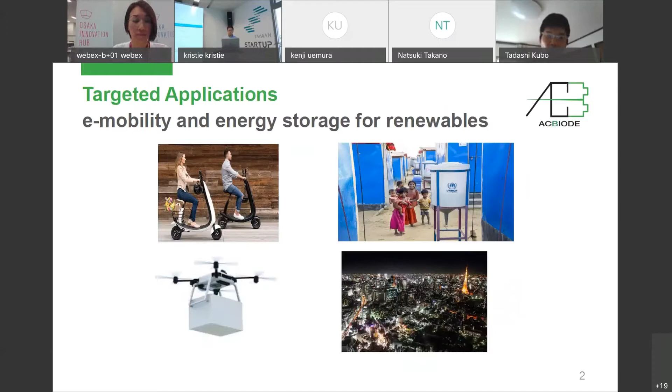The challenge of the battery is that we need better and safer batteries. Dr. Yoshino last year won the Nobel Prize in chemistry finally. But at the same time, we realized it takes lots of time and money to develop new materials or new types of batteries other than lithium-ion batteries. Over the past 30 years, the basic principles of lithium-ion batteries remain the same because it is so difficult and takes time as well.

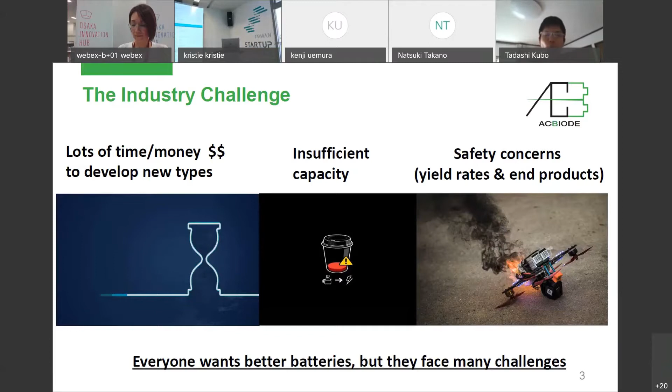So our concept is that we use all the existing materials and existing battery production lines. We don't change those, but we change the current from DC to AC, because power transmission, distribution, and motors have both options of AC and DC. But all the batteries in the world work at DC only, not AC, and we were wondering why.

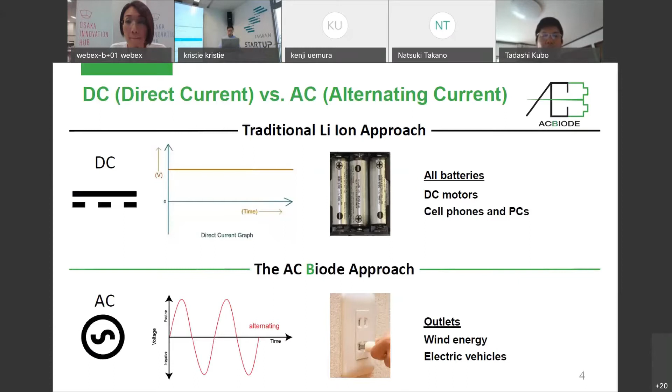So we have developed the world's first AC battery using a single battery and a single switch. The electrode we developed is named Biode, a new word we created. It's like an intermediate electrode between the anode, minus, and the cathode, plus. The blue ones you see on this slide are our biodes, and we set multiple electrodes within a single lithium-ion battery. All the materials and battery production lines remain the same, so we don't change them.

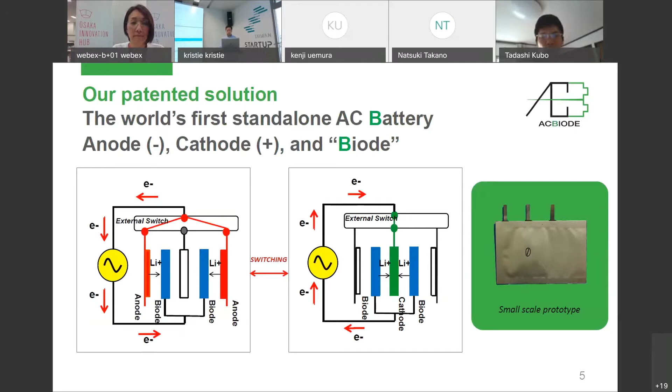The advantages we have compared with current DC lithium-ion batteries are mainly seven. First, it's safer, and we reduce the cost of battery electronics because we can minimize inverters and converters that convert between AC and DC. We double the lifetime. We have higher capacity with a special circuit we're also developing, named the Cockcroft-Walton multiplier, plus 15% higher capacity from the biode, which also acts as a separator — it's an integration between separator and electrode.

It's chemistry agnostic. First, we're going to apply it for lithium-ion batteries, but we can also apply it to, for example, lead-acid or solid-state batteries, future battery types as well. Last but not least, it's compatible with existing materials and existing battery production lines, so we use the same supply chain.

These are some examples of our competitive advantages. We split electric potential from 4 volts, as in current lithium-ion batteries, into 2 volts each. But we keep the 4 volts entirely, so we don't lose capacity, yet it is safer.

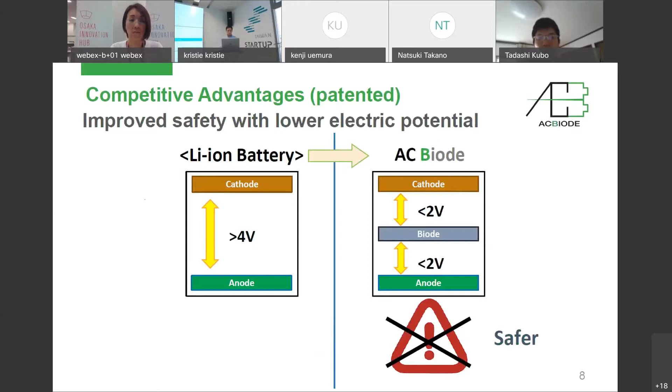This is the image of how we minimize inverters, for example. Brushless DC motors, even though named DC motors, actually use 3-phase AC for their motor system, such as in electric cars. Right now, DC batteries convert from DC to 3-phase AC through an inverter. Now, each of our batteries emits single-phase AC, so we can minimize this system, making it more compact and more affordable.

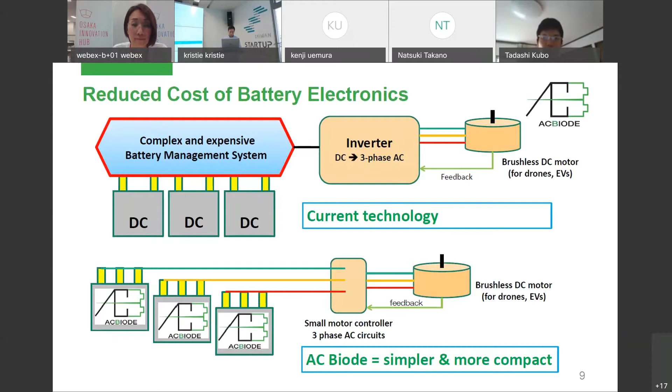The Cockcroft-Walton multiplier isn't something new. It was established back in the 1930s at the University of Cambridge in the UK, and was used to boost voltage for particle acceleration or X-ray equipment. Our idea is to combine our AC battery system with this circuit, because its input has to be AC, not DC. So this is a perfect match between AC batteries and the multiplier.

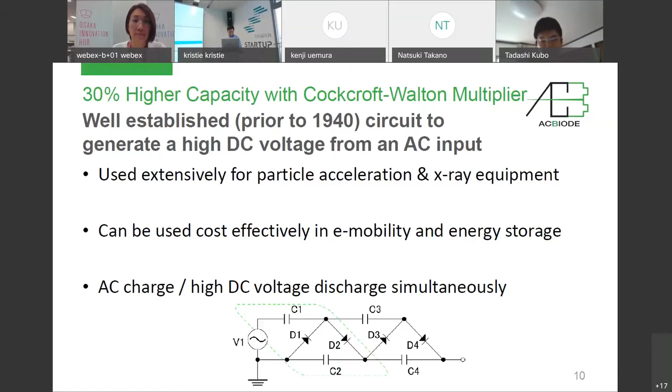We already got patents on these concepts, ideas, and structure. The market is growing — we would tackle the Asian and European markets, which will be worth 21 billion US dollars by 2026.

Right now, we have already raised seed funding and got some support from the government. By the second quarter of next year, we will first test with industrial drones, because drones are much easier to start with. Then we will also test with e-scooters, e-bikes, and other micro mobility. After that we will tackle electric cars and energy storage, especially for wind power, because wind power generates AC power, not DC, while solar panels generate DC power — so probably the best fit will be wind power.

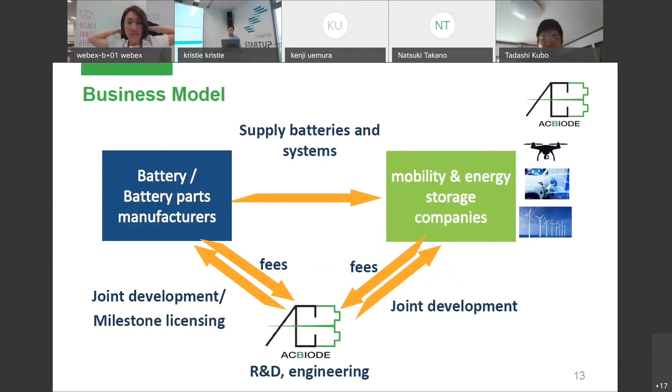Our business model is providing licensing, receiving license fees by offering licensing or joint development together with battery companies or battery parts manufacturers. We could also get fees from end users in mobility and energy storage. We aim to reach around 10 million US dollars in sales within 4 years.

We get several good feedback from clients and several institutions, such as University of Cambridge, MIT, European Space Agency, and the City of New York, and more. And we get investment from EIT InnoEnergy, which is a body of the European Union. The European Union wants to have a local battery manufacturer and startups in Europe, because right now European countries import

almost all the batteries from East Asia, such as Taiwan, Japan, South Korea, and China. So the traction we have so far, as I mentioned, we already have prototypes, and we will do pilot tests with drones next year. We already received at least 5 LOIs from battery companies and potential clients, as well as industrial end users such as drone companies and more. We also won 16 awards from startup pitch competitions around the world, and we're supported by the European Union as well.

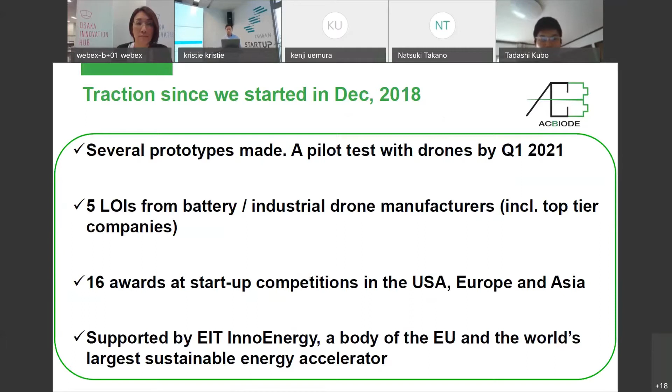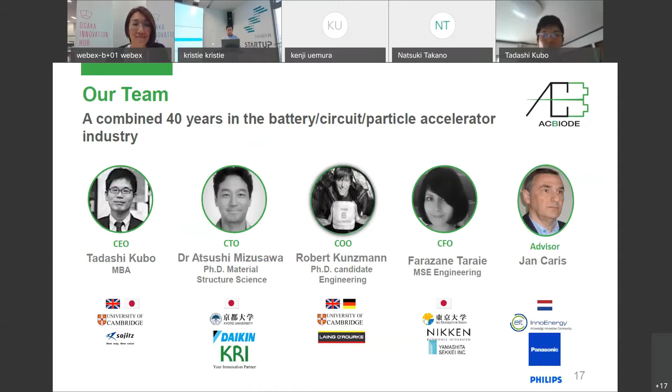So it's almost time, so that's it. And I'm happy to answer your questions.

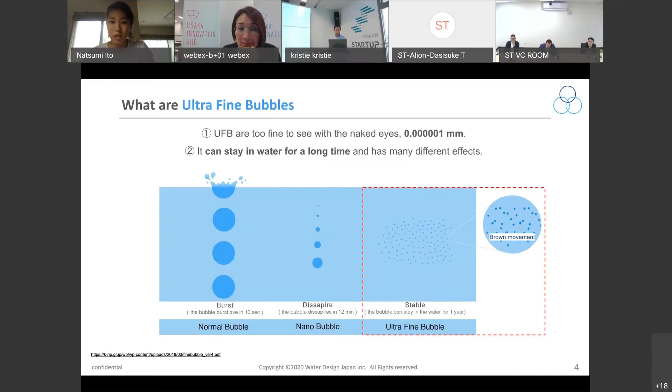It moves around like Brownian motion, and because of that, the bubble can stay in the water for more than a year or so. Because of this interesting effect, ultrafine bubbles have been proven and tested to have several effects, such as these 4 effects.

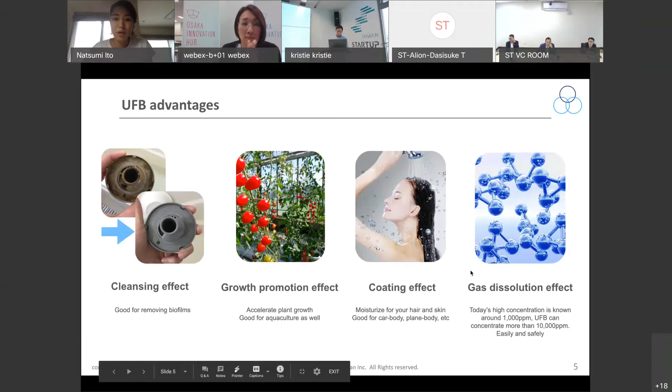First one is cleaning effect and growth promotion for the plants, and coating effect for surfaces, hair or skin, and the last thing, gas dissolution effect. It has many interesting effects, but today I would like to focus on the cleaning effect part.

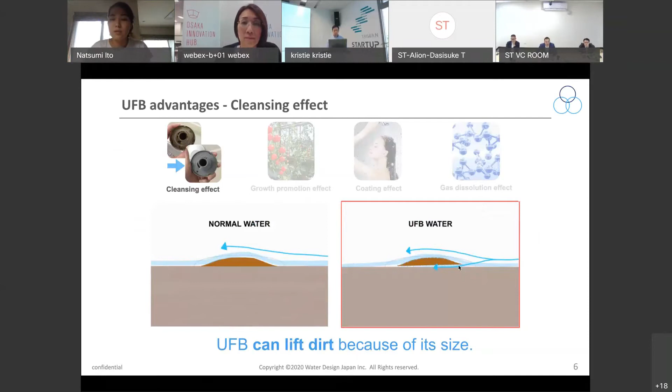So why the water can have a cleaning effect is that the bubble size is very, very small. It can reach to the bottom of the surface and it can gradually go underneath the dirt cell to lift the dirt cell itself and remove it.

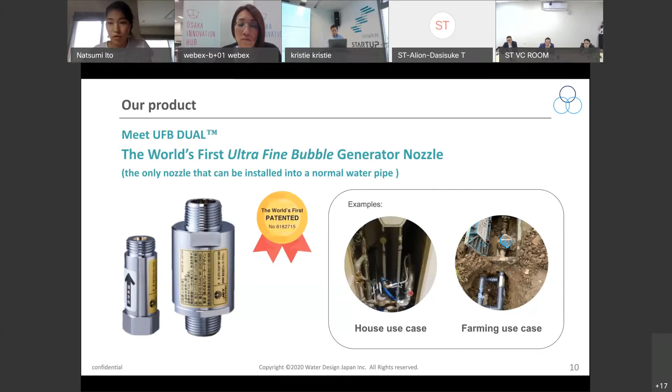And our product is this, and it can generate that technology, ultrafine bubble. Our product got a patent and also approved as a water supply in Japan, so our product can be implemented after the water meter. So all the water coming into your building will be transformed into ultrafine bubble.

The technology we use is basically a cavitation system. So let's say the water coming in from the left side. Once the water passes through the nozzle itself, we can generate the ultrafine bubble technology.

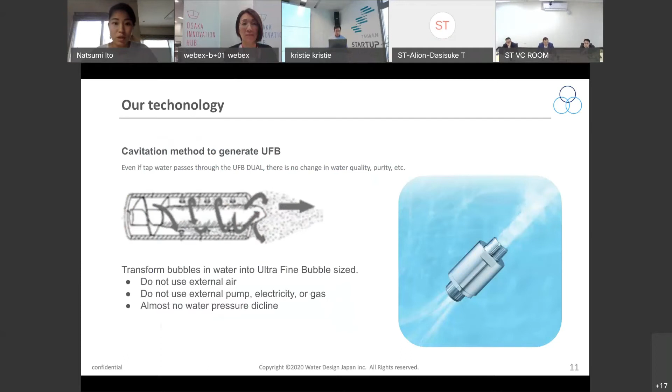The difference compared to competitors is mainly that it's installable into pipes. There are around 100 to 200 competitors who are studying or trying to produce an ultrafine bubble related product, but none of them have passed this certificate. Only we have this certificate to be implemented as a water pipe, and why we were able to do so is basically two points.

The first one is the way we generate the bubble. We don't use external air because this air can contain a lot of germs and bacteria, and it's not safe. So we use water, and by doing that, we were able to pass the drinkable test in Japan.

The second point is almost no more water pressure decline. It's a complete standalone device. You do not have to have an external pump or electricity or gas or anything.

Lastly, since we have different customers from factory to home building to hospital, we can customize depending on the customer's needs in sizes and materials. And we got certificates such as those.

So let me explain a little bit about the actual use cases. Our product has been used at hot spring facilities in Japan. The problem the hot spring facilities are facing is the Legionella bacteria, which is really hard to remove.

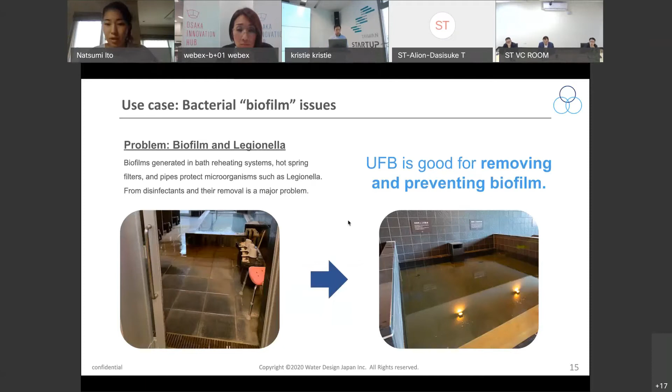This bacteria lives in the biofilm, and ultrafine bubble is good for removing and preventing biofilm itself. So the hot spring facilities were very happy using our product, and a lot of hot spring facilities have been using our product right now.

This scale is tricky because in order to clean it, hospitals use a very strong chemical and have to clean it consistently. By using a strong chemical, sometimes the water pipe gets really damaged, and it was a huge problem for the hospital itself.

We used ultrafine bubble with it, and we were able to reduce around 60% of the maintenance costs by reducing their chemical use.

Right now, they have still been using it for almost four years, and they also reported that they haven't changed their filter, which costs around $10K US per year, but they were not changing that filter. So it's a cost reduction for the hospital itself.

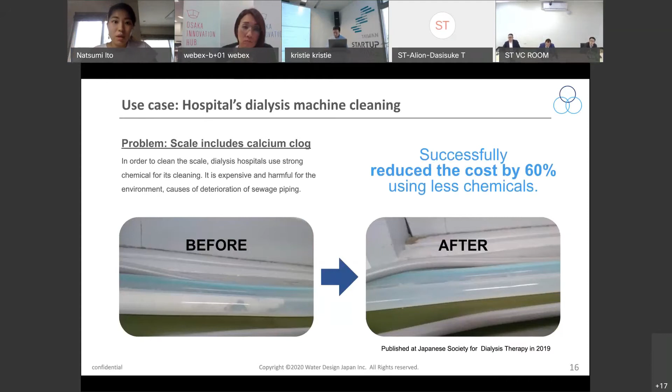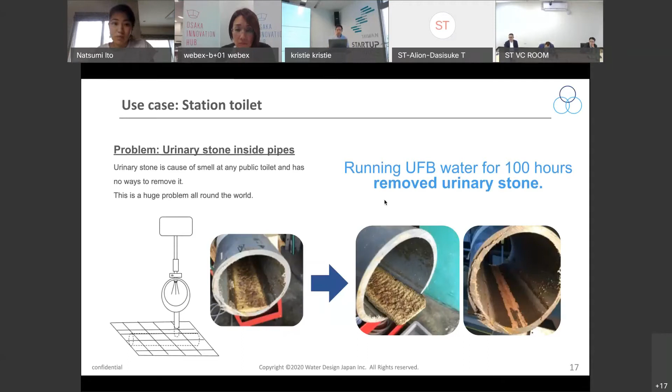We are a startup, but we are growing organically without any marketing. Our product has been used in more than 5,000 places in Japan at the moment, and we are bootstrapped. This year we're expecting $1 million US revenue, and we have partners such as cooking oil manufacturers, energy companies, healthcare, and of course housing, restaurants, beauty salons, hot spring facilities, and a lot of different places.

And now we are looking for a partner, not just a sales partner, but we have on top of that a lot of different benefits from partnering with us.

We already have been working with many different companies in Japan. This is the team, and our founder is a former CEO of Mitsubishi Chemical Company, that's why we were able to build such a product. There is some more information, but that's Water Design Japan.

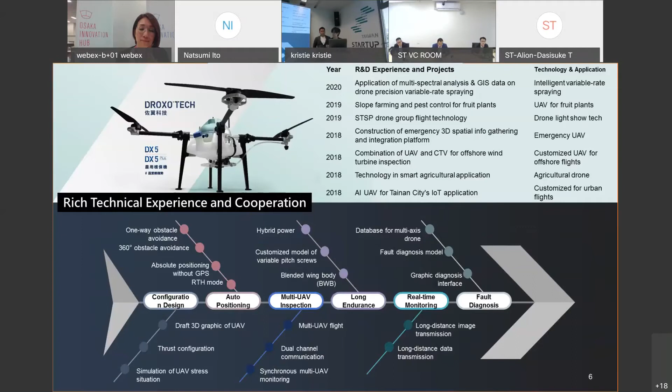Drone is just a vector. With different sensors or software and integration, a drone can do a lot of different things, so the focus is not only on the drone, but also on the integration. That's the key point. We also have a total solution for a city.

We anticipate problems that may appear in a city from all aspects, as you can see here. We have experience in a smart city program with our local government in Tainan. Through this project, we use panoramic sensing and aerial shots through a 360-degree camera equipped on the UAV to take shots of our city land.

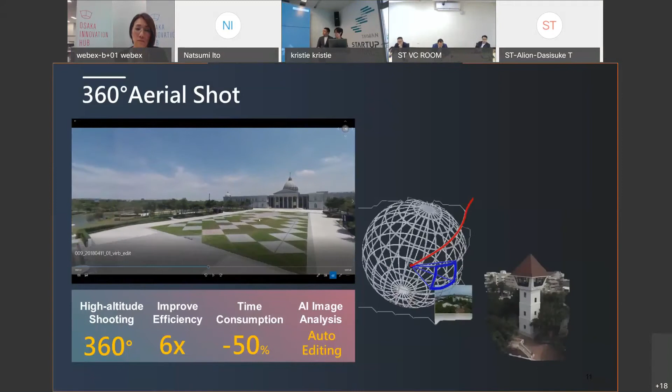Through this project, we developed multiple generations of drones. This is the first film, and we also combine artificial intelligence to auto-edit the film to make it more optimized. Through this footage, we can create a big database, and through this database, we can realize traffic monitoring, allowing rapid deployment and wide coverage.

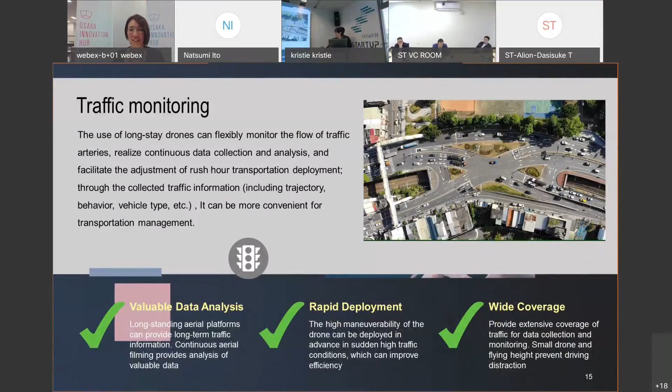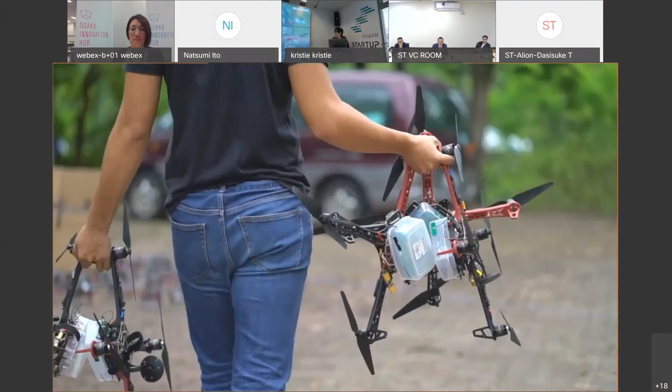To perform it better, we developed our own electric fence technology, which can prevent the drone from exceeding and wandering outside the range, avoiding accidents. And also here for inspection.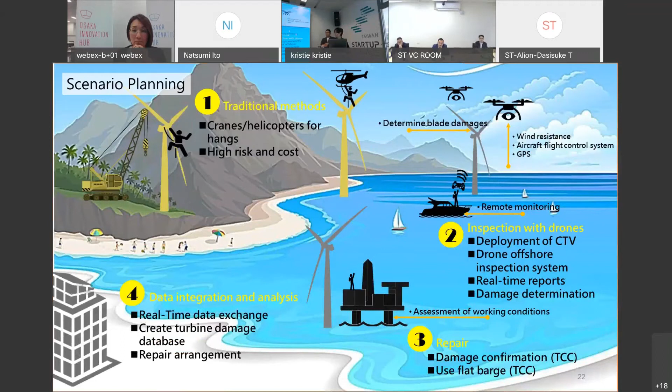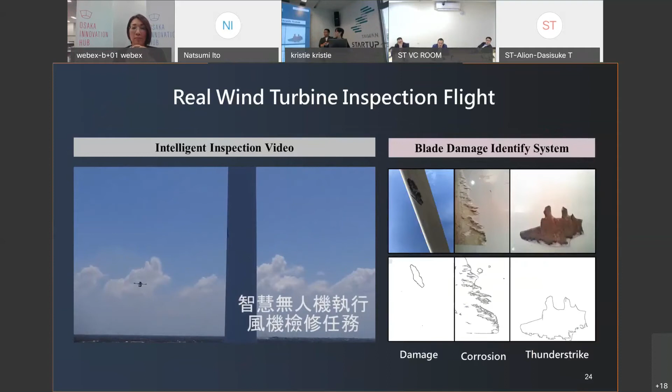We do wind turbine inspection with drones, and we're the first to combine a crew transfer vessel with a drone. We also use artificial intelligence again to auto-identify blade damage, which is much more efficient than traditional ways of checking using manpower.

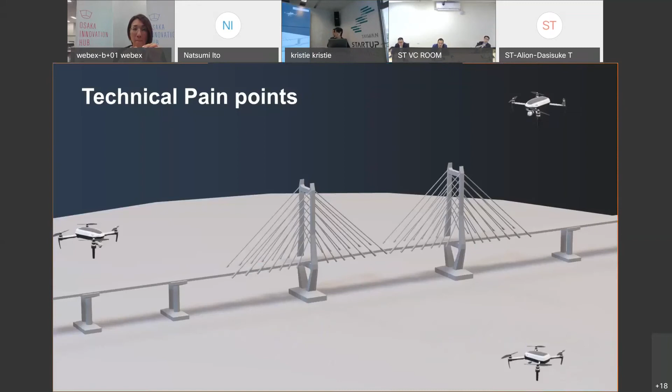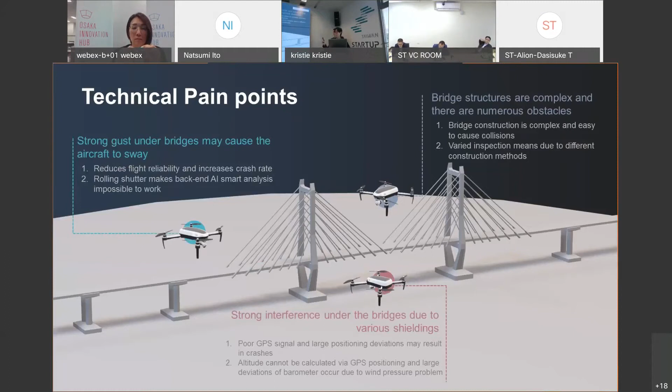Now, bridge inspection, which is much more challenging than wind turbine inspection because there are a lot of pain points—a lot of constructional obstacles around bridges that could interfere with the UAS system. So we came up with a total solution: a smart drone that can mimic the brain of a human, reacting to obstacles or different kinds of stimuli.

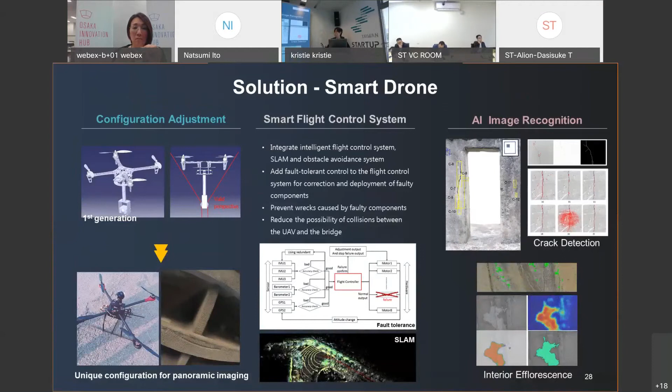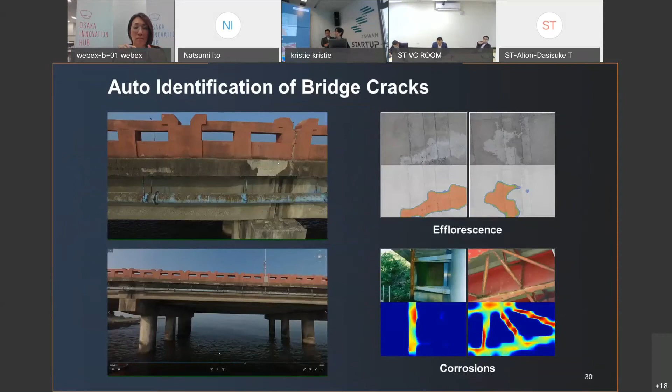We're trying to be among the first to combine drones with a 5G frequency band, which is a really hot topic in industrial fields recently. Again, with artificial intelligence, we can identify bridge damage.

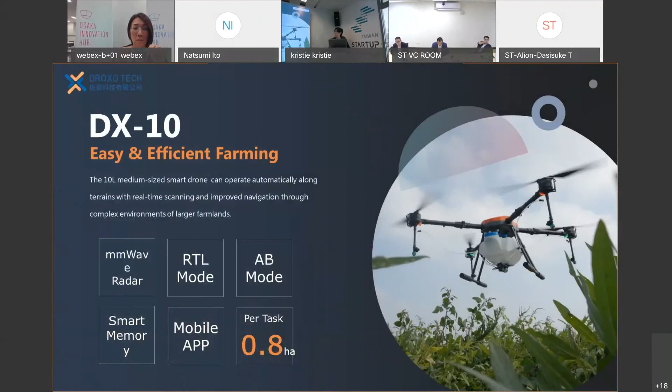Here are the agricultural drones, the most mature product, much more efficient than traditional spraying. This is a film of our product, but due to time limitation you can view it later. We have different modules—here is the DX5 with a 5-liter tank, more suitable for the Taiwan market due to scattered, rather small landscapes. We also have a bigger model with a 10-liter tank equipped with terrain-following radar.

The most important part is that we provide education and training afterwards. For further technical improvement, we cooperate with local research institutes to get more practical experience, and for optimization, we have face-to-face idea exchange with farmers.

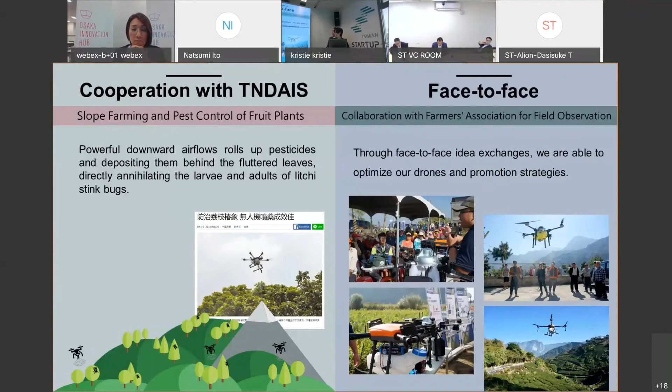For our globalization, through market survey we set our market in Brazil, and we have a comprehensive business model and estimated timeline, but it's a little bit postponed and delayed because of COVID-19 this year. We think after Brazil, we'll set our next step at Southeast Asia. We would like to bring their agriculture to intensive farming rather than their more traditional ways.

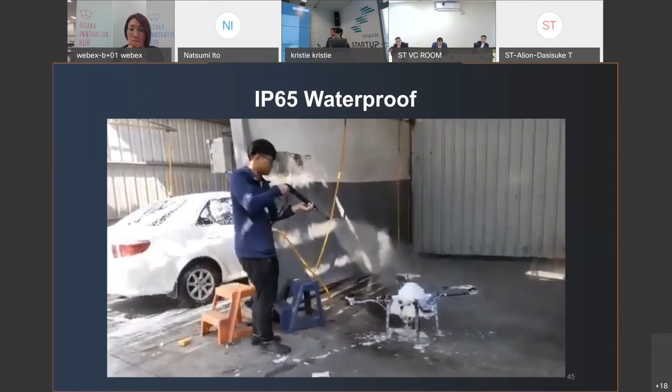All our drones are waterproof, and our DX5 model is tested and has the IP65 waterproof certificate. We have field test results here, as you can see, really effective.

Because we are a startup of UAS, there are two essential things we want to say. The first is we need capital, that is to say fund, from investors outside our company. The next is we are really looking forward to cooperating chances and opportunities, and we are willing to provide our services internationally and market our products. We are also looking forward to innovation and the combination of different kinds of technology with drones. We are totally open to any kind of international collaborations. Thank you for your time.

I'm happy to share the present Olive Giken's company and our product. Our philosophy is facing people and natural health. First, I'd like to talk about our company.

Our company was established 4 years ago by founder Mr. Matsushita, to produce aqueous calcium ion-based products we call the MyNIC series. MyNIC is presenting of new ionic calcium, and M is the initial of the founder, Yoshihiro Matsushita. Two years later, he filed a patent and it was granted. This is epoch-making, our core patented technology.

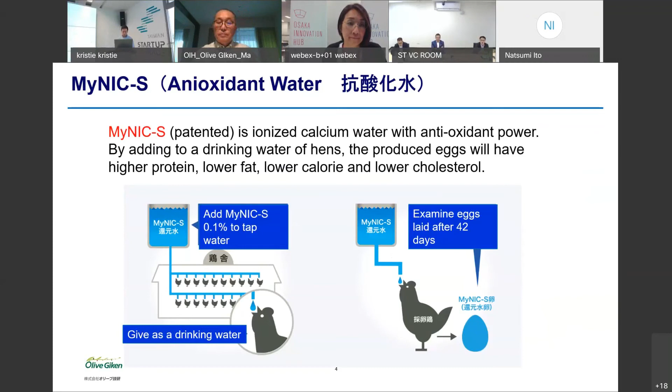Moving to our new product, our target is people who are looking for a safe and secure life with and after coronavirus. To keep our economy running, you have to go to work by crowded trains, maybe same in Taiwan, Taipei subway, and many places have to be disinfected after work or before. So our MyNIC-S-based new product offers a virus and germ-free environment by killing and removing them from surfaces without alcohol or hypochlorous acid water.

People don't like alcohol, some are allergic to it, or don't like the smell of hypochlorous acid water. Our ingredient has been used for many years to make moyu tofu, or in Japanese konnyaku. This means our major ingredient is absolutely safe for people, from infants to the aged.

This is already proved, the chemicals. And also other chemicals we use are all food additives, safe and clean.

So what we are looking for today, opportunities, is cooperation in Taiwan as a hub for Asia market penetration and OEM. Our patented technology can be licensed or made into joint ventures for local production. Also, technical support is available from Osaka. Also, we are looking for further funding to accelerate our innovation and IP strategies.

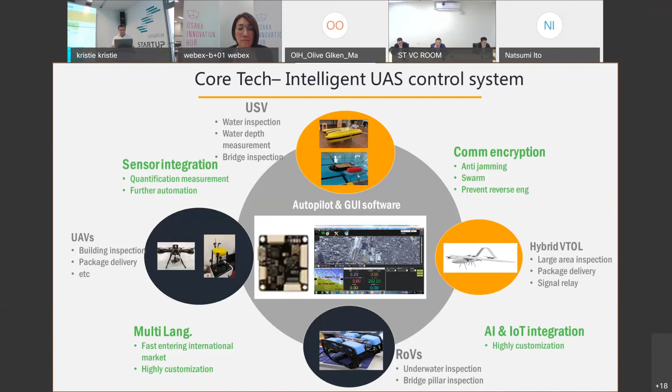So, okay, the next one: what do we want to do? The current status of environment infrastructure, are they safe? For example, everyone heard last year there was a bridge collapse in Taiwan, but a year before there was one collapse in Italy. So this is common sense.

And then the water, the first thing is, is the water safe? We don't know. We had a news report last year, I think it was in Japan, there was one dam where the whole plant grew in just one day.

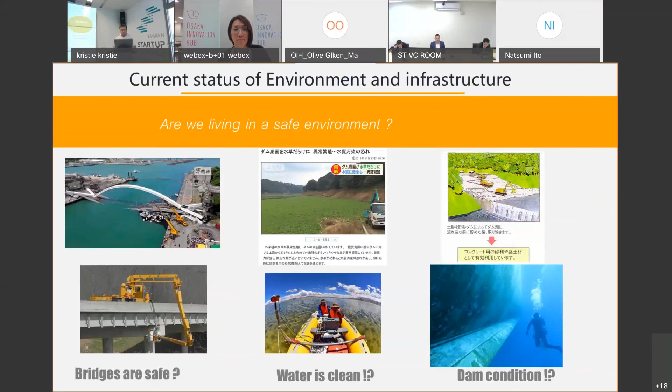So the water, they have to replace the whole thing. And then the other one is a dam condition. It's a hot topic nowadays because with continuous flooding, you need to know if your dam can stand up to this condition. So we have this problem, but the problem with the current inspection method is they're all full manual and not detailed. And the worst thing is a dangerous environment. Because we are in the industrial 4.0 environment, but the inspection is still like 1.0. All this together leads to one common thing: the inspection becomes expensive, and because it's expensive, we are not able to do it continuously or often.

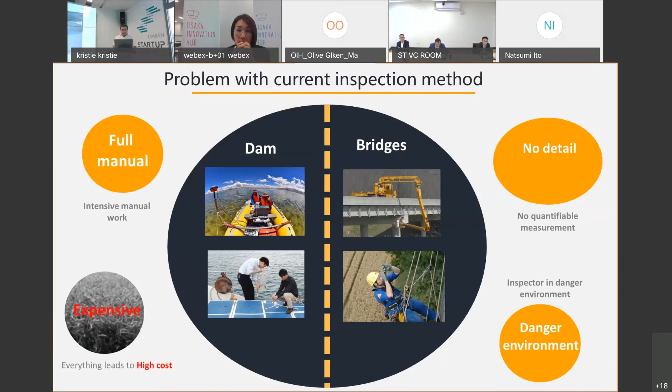So how do we solve this problem? First, let me quickly show you the feature. Because it's the internet, there's a bit of lag.

Basically, our drone is created for bridge inspection, but we create it differently in that our drone can actually attach to a surface of the building you want to inspect, so you can collect very detailed information from the surface. For example, in this picture you see the bridge bearing, and this is the first picture by a drone ever in the world, because no one has ever flown that close. Our system can actually attach to a surface to collect the image.

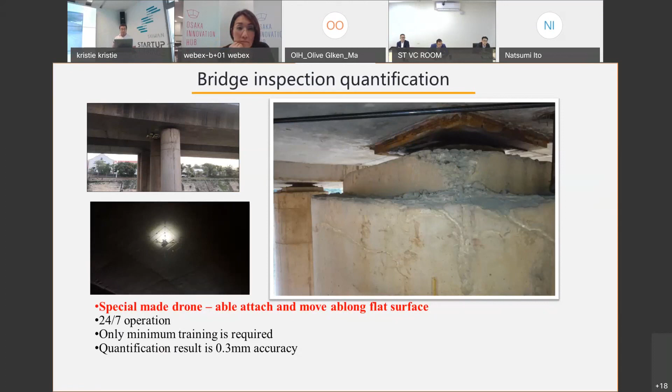But collecting is not the only thing. We are able to quantify results because we created software that can quantify the damage, like the size of the damage, without any reference, and our accuracy is up to 0.3 millimeter. That fits the regulation in Taiwan.

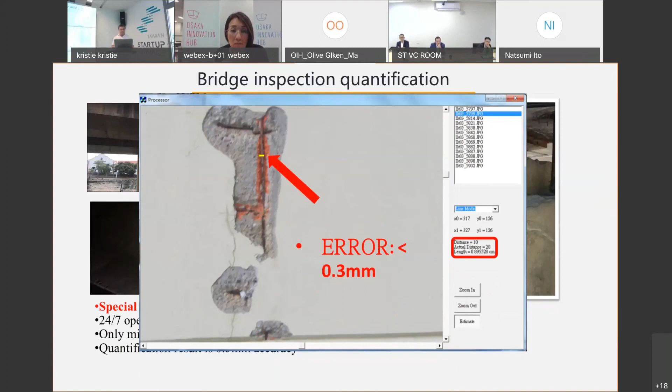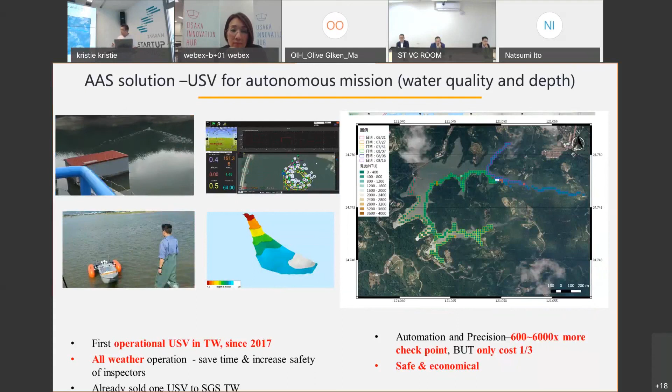By this massive data, we can actually identify the source of the pollutant and the source of pollution, and generate a very detailed map of the pollution of the water dam. In terms of cost, it only costs a third of the traditional inspection method, but the accuracy is 600 to 6,000 times better.

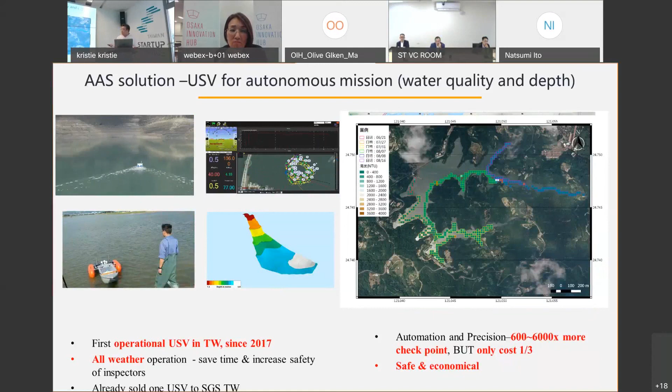Okay, next one. After we have all this technology, what's our business plan? Our business plan is actually quite simple: from Taiwan, we want to provide a service, but for the international market, we would like to do rental or product sale, because our team is not big enough to service every country. So what we would like to do is sell the product to other countries. Our plan is a very basic B2B plan.

The most important part now is actually the market size. By doing this, is it profitable? If we look at the market, in Taiwan each year for the inspection of water, inspection of bridges, and all that together, we estimate it's about 900 million NT dollars per year. The world market is estimated to be 21 billion US dollars. Our goal is to capture a third of the Taiwanese market, and for the world market, we estimate about one-twentieth.